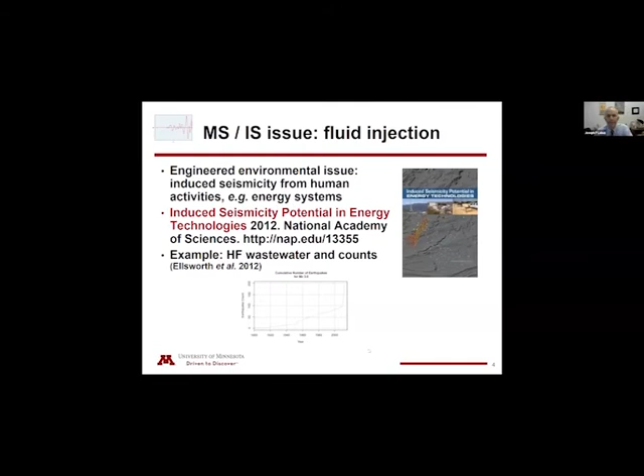And this is just one example of looking at counts of earthquakes above a certain magnitude that very recently have taken off. And this is in Oklahoma. I guess a number of the students may not know of this, but there was a similar incident in the early 60s, just outside of Denver. The Army was pumping waste fluid within the earth, and induced seismicity was created. This started a large investigation, and in fact did lead to the suggestion that we may be able to control earthquakes by pumping fluid or withdrawing fluid.

And a big part of my talk is going to feature locations, and I'm just showing an example from the Raleigh paper of tracking of slip along a fault that was known to exist, where a number of events were located along this fault.

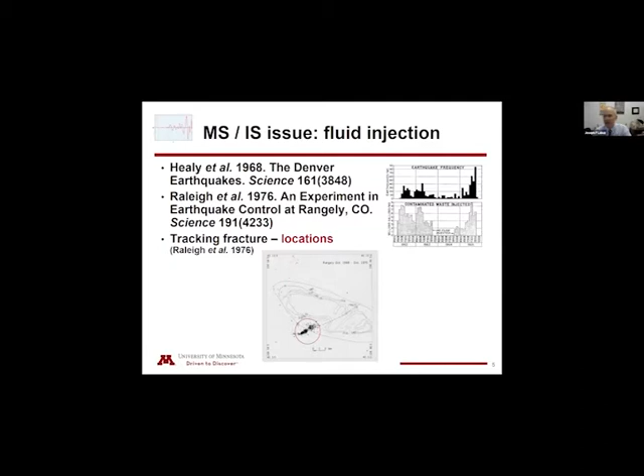Okay, so I'd like to provide a very brief background on acoustic emission, the theory of acoustic emission. And it's really driven by seismology, the field of the study of earthquakes. I mentioned locations. This problem was solved in the 1900s, and certainly there are a number of different types of techniques that are used to locate the seismic event. In the 1930s, there was a book on seismology that was published. And of course, I wanted to reference a very valuable reference for any work dealing with the propagation of waves, and that is the Aki and Richards textbook on seismology.

In the 1940s, the study of microseismics as it relates to the underground, that is a mine, began here in the United States with some very nice work that was being performed at the US Bureau of Mines, which no longer exists. But this report really started the mining industry to look at monitoring mines for microseismic activity as an important safety feature. So work really took off then, not only in the US, but South Africa, Germany, Poland, dealing with the use of microseismic as a safety procedure within mines.

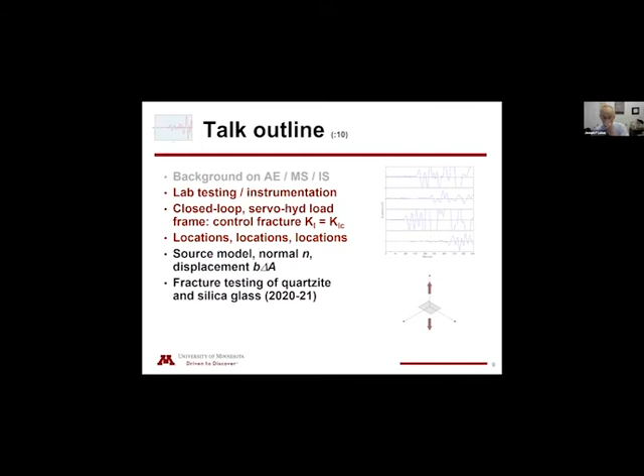Okay, we have a big advantage in the lab in that we generally know the region of interest in which we want to monitor the deformation processes that are taking place. Typically, that region is on the order of 100 millimeters in size or so. This region, of course, is a volume, so we will sample through the volume. We can position our sensors such that so-called blind spots are not an issue. This can be important in field studies where, depending upon the sensor array, it may be difficult or impossible to locate events in certain areas.

Because we're working in the laboratory with small magnitude events, very small in size, the frequency content is inversely proportional to the size. So frequency content is on the order of hundreds of kilohertz. So we need a very fast data acquisition system. We sample typically 50 nanoseconds per point. The electronics now are such that we have 16-bit resolution. We simply start recording when the time history exceeds an amplitude threshold. So this is a very simple way of starting the recording process. The digitizers are such that there is a buffer that remembers the information prior to the amplitude threshold.

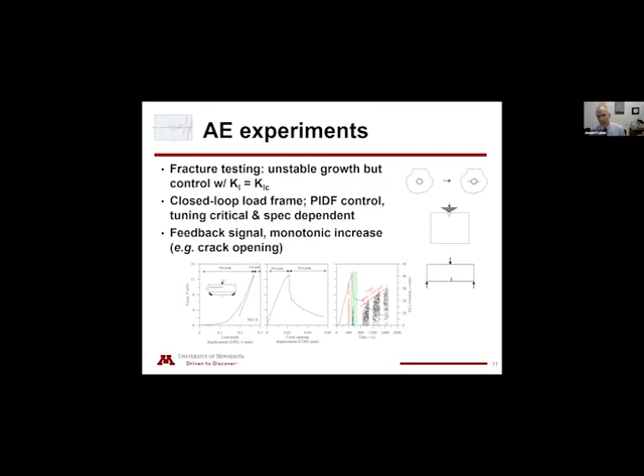So this propagation of this fracture is rapid as compared to the propagation that takes place in this softer type of response that we're observing, where control is much easier. I just wanted to mention that the beam is a very nice analog for tensile fracture, certainly within the rock mechanics environment. That is the types of problems where we deal with cavity expansion, for example, in hydraulic fracturing. This is a tensile fracture type of process, indentation mimicking rock cutting, again, a tensile type of process. At least that's what is hopefully achieved in indentation.

So as I said, I'll concentrate on the failure mode of tensile fracture in flexure, in the bending type of loading. And for the most part, the loading configuration will be 3-point bending. We have done cavity expansion, splitting, Brazilian testing, indentation, and of course, confined compression. But I'll be concentrating on the tensile failure results.

The location problem, as I said, has been well studied. For us, the problem is not that difficult in the sense that our material is more or less homogeneous. For the most part, we work with rock that's fairly isotropic. So the location problem is not difficult. Because of the amount of data that can be generated, picking the first arrival is usually done through some algorithm. So for example, I'm showing an acoustic event, that is a signal that's recorded on 4 channels.

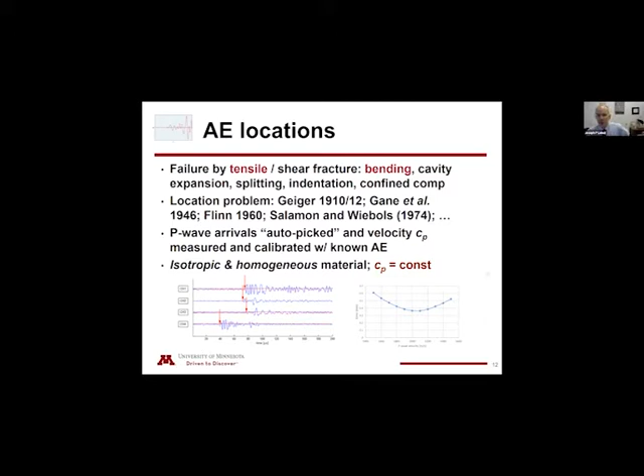Okay, a nice way to look at locations is graphically, and for a 2-dimensional problem, it's easy to show, it's easy to construct. I should mention something about error, and of course this is in quotes because we don't know the answer. So we calculate a location. From that calculated location, in reference to the position of each sensor, we can calculate a distance. And we can compare that distance with a distance that we also compute, because we have to find the origin time, the time in which that event took place in reference to the arrival of the signal. So this time difference multiplied by the P wave velocity gives us another distance. And this difference for each sensor gives us a measure of, we call it error.

So in terms of the 2D analysis, we can construct hyperbola. So this is a parametric equation for a hyperbola. Delta T subscript 1, 2 is simply the relative arrival time between 2 sensors. So again, I'm showing a time history that's recorded from one event on 4 channels. And the red arrow indicating the first arrival of the event associated with the P wave. So channel 1 in reference to channel 2 has a difference in time that we can measure, and that's the delta T that would be used in computing the characteristics of this hyperbola. And of course, we do that for a number of events, and where those cross indicates the location.

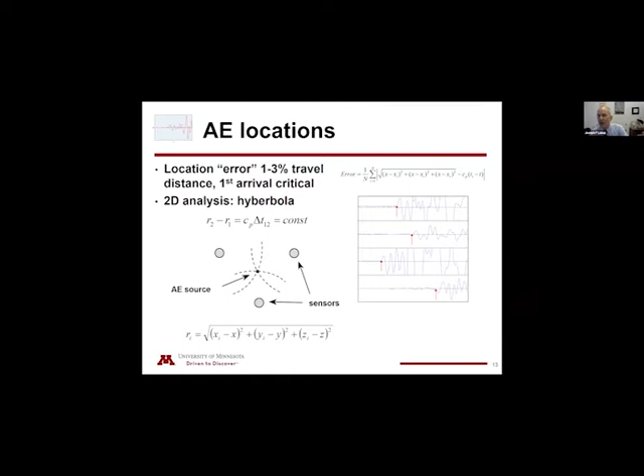Okay, as I said, we record thousands of events, and the solution then needs to be developed where we have a numerical algorithm. We have 4 unknowns, and we can set up an optimization problem where we minimize an error to find these 4 unknowns. The things that we do know, the arrival times, we take the P wave as a known quantity. It can be treated as an unknown and found within the minimization procedure. I mentioned the automatic picking of the first arrivals. And again, this is set up to be solved in a least squares type of algorithm.

I'm now showing results again for a beam test with a smooth boundary, no notch. And these are locations of acoustic emission. I'm showing them just on the XY plane. So I should have indicated a coordinate system. For us, X will be in the horizontal direction, normal to the development of the macro fracture that will appear in this beam. Y is in the vertical direction, and Z is in the thickness direction out of plane.

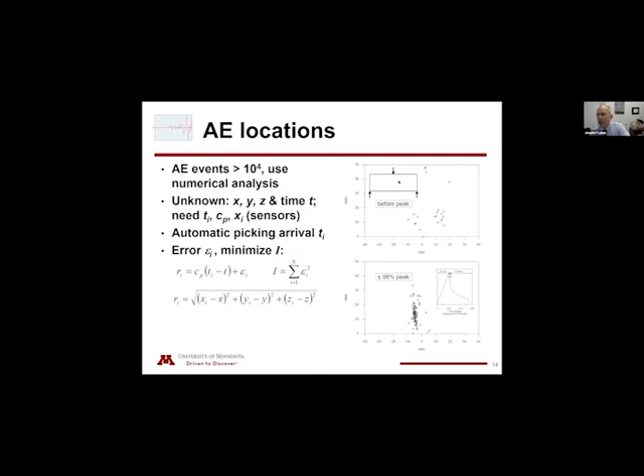The other thing to note is this is a smooth boundary. The loading is 3-point bend. The maximum moment, of course, is along the line of symmetry of the beam. That's the position 0. But the fracture is developing slightly off center because of possibly local heterogeneity of the beam, as well as possibly some imperfections in our loading system. That is how we position the beam.

These are, again, the same results. This particular beam was of 75 millimeter height. If we test the same material, similar geometry, but double the height, this beam now is 150 millimeters in height. I would argue that the picture of this clustering of the events, again, around peak load is very similar. So this fracture, at least for this material, for these size beams, is developing in a similar manner.

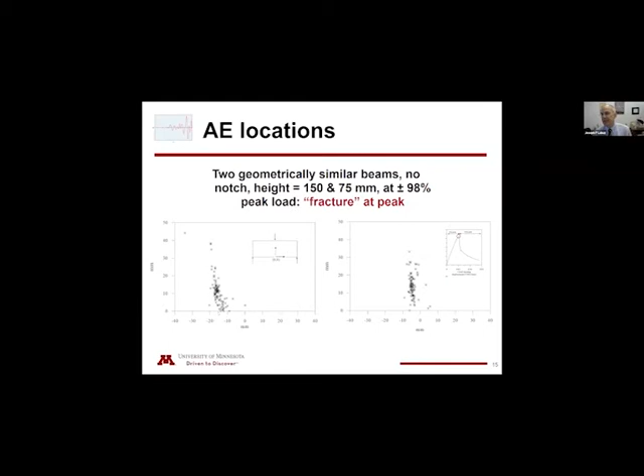So I would argue that AE may be one of the most effective ways of monitoring fracture, including propagation. It has the advantage of sampling the entire volume. A disadvantage is, of course, there's location error. So if we want to determine a crack length of 10 millimeters and we have an error of plus minus 2 millimeters, that may not be of a fine enough resolution.

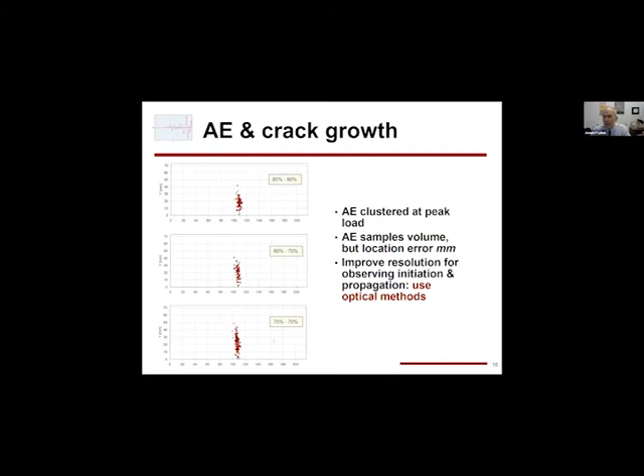So what to do? Well, in a laboratory setting, we can use optical methods. So we've done that. We started with speckle interferometry, and certainly this is a technique that other people have used. So we copied from work at Northwestern with Professor Shah's group. The nice feature of speckle interferometry is that it's simply based on optics. So the processing of data is trivial. Setting up the optics is quite challenging.

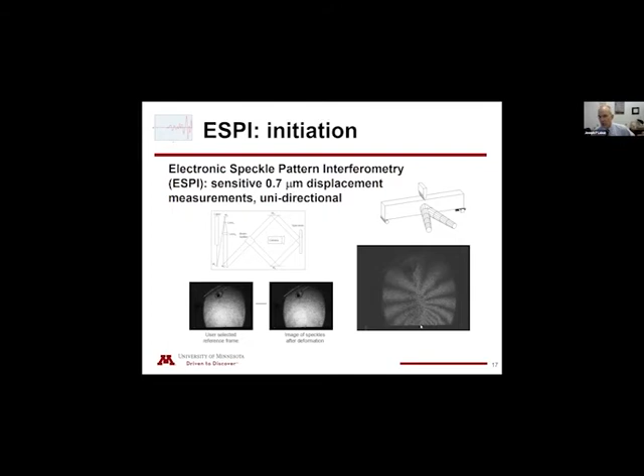So what I'm showing here is a condition that is measured at peak load. And these fringes that develop are due to what I would describe as a displacement discontinuity, a fracture that's forming at the bottom fiber of the beam. And this particular beam is also with no notch, smooth boundary. We can use the information about the fringes because each fringe indicates constant displacement in the X direction only. So it's a limitation of at least our system.

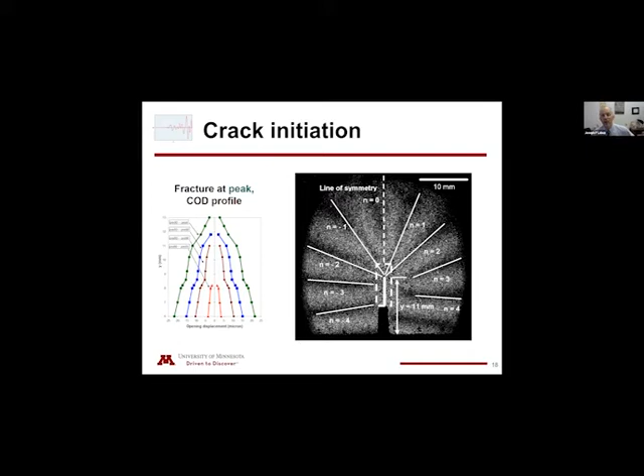And we could track the crack opening profile as well as the position of the tip as the fracture is initiating in the beam. This particular beam is now one where there is a notch present. There are some disadvantages with speckle interferometry. We could not use this within a closed loop system because of the vibrations that come through from the servo valve. So not a very convenient technique.

I'd like to review with you now theory related to determining more information about the crack, and I'll show you brand new results. So I'm ready for tough questions. Dealing with fracture of, I would describe as a brittle rock, a quartzite, and a brittle material, so glass.

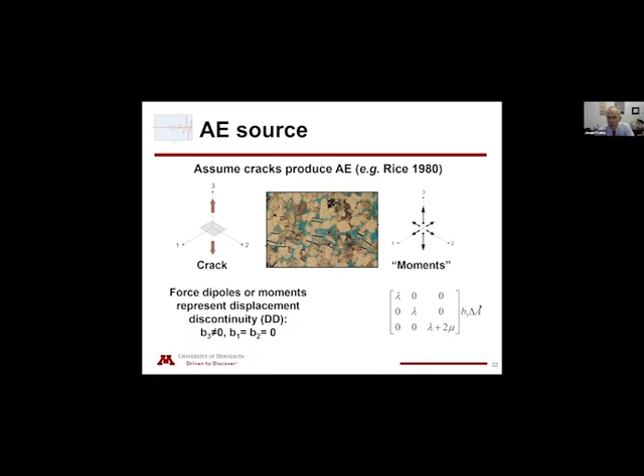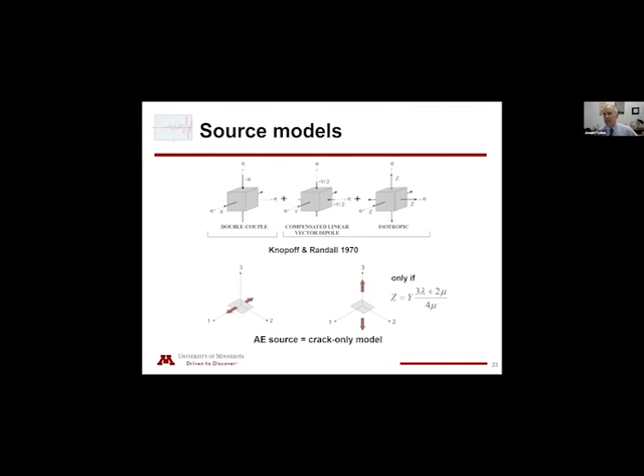I should mention that in seismology, generally, earthquakes are associated with shearing type of mechanism. So within seismology, the important part of the moment tensor is associated with this double couple. There often are other parts of the moment tensor that can have a physical interpretation. For example, the other part can represent a crack that opens if the combination of these force dipoles are such that this relationship holds. So to have a crack only model, we need to build our moment tensor to have a certain configuration.

Now, another way of approaching this is to look at, instead of the moment tensor, what is sometimes referred to as a displacement discontinuity tensor or a crack tensor. And that's this quantity psi, where B is the displacement vector and N is the normal vector. And immediately you see that we could interchange B and N, and psi does not change. So this is a limitation of the analysis.

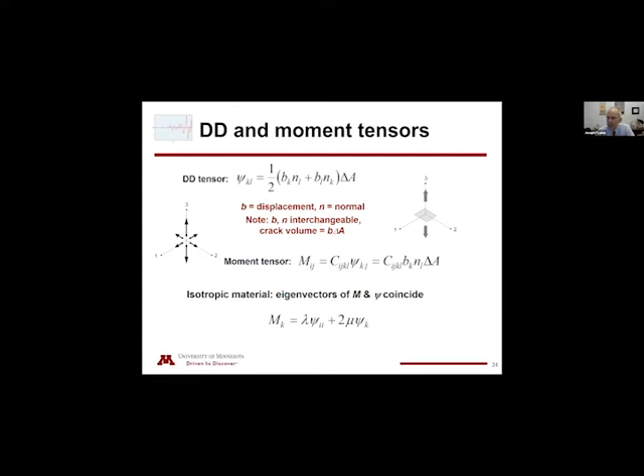There is a simple relationship between the moment and the displacement discontinuity, and that's given by the elasticity of the material. So we could write the moment tensor in terms of B, N, and delta A by knowing the elasticity of the material. For an isotropic material, so again, an important assumption for us, the eigenvectors of M and psi coincide. And this is convenient because if we now solve the eigenvalue problem for psi, the displacement discontinuity tensor, we'll be able to write the quantities that we're after.

So note that the displacement discontinuity tensor has the intermediate eigenvalue that's 0. Only the major and minor have values, and the magnitude of the event is related to those two. It's the difference. And an important angle for us is given by, again, the minor and major eigenvalues of psi. And this angle alpha is a measure of the angle between the first eigenvector and N, or of course B. So the mechanism will only be known if this angle is 0 because then N and B coincide.

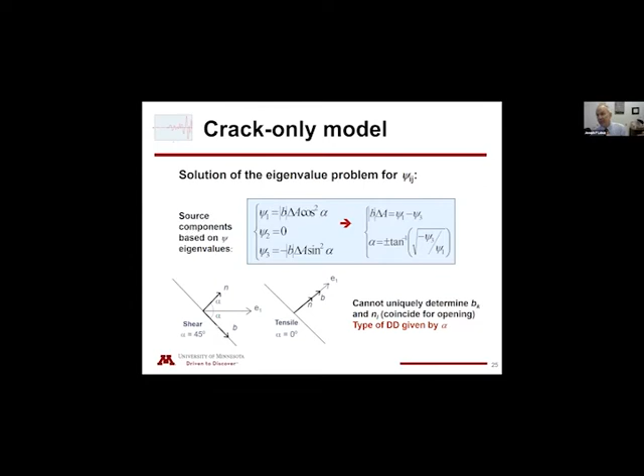So the important information that we'll be able to obtain from this analysis will be B delta A, alpha, in which we will be able to compute N and B, but N and B can be interchanged. Okay, so we use an approximation of a point source in an infinite domain. That solution is well known. It's available in various references.

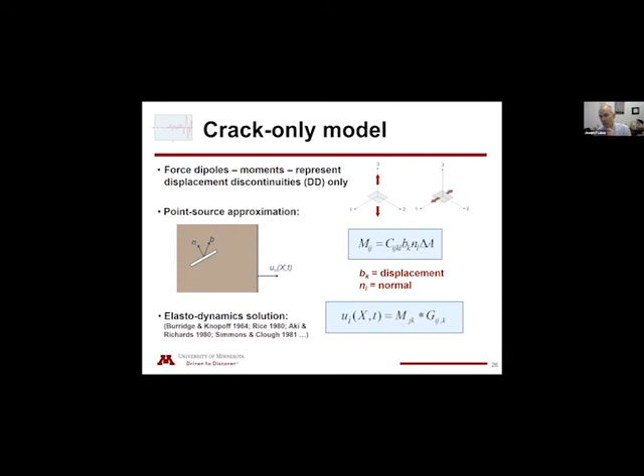So in terms of how we use this solution, we place our sensors at the boundary of a specimen. We claim we can measure, so calibration of the sensors becomes very important. We can measure the displacement at those locations. So we know the displacement, we know the Green's function for this point source in an infinite domain. We need to solve the inverse problem for the moment tensor. The way we need to do that, because we do use the solution that's written out in terms of the moment tensor, we have to guarantee that the intermediate eigenvalue of M takes this form, because we want the model that's associated with crack only.

So we claim we can measure the displacement at the position of the sensors. We calculate the displacement that the moment associated with that event would produce at that position. We do adjust for the free boundary in terms of a mode conversion that takes place at the free surface. And this other part is the constraint that we must impose to get the crack-only model.

I'm showing here quickly the results of a calibration experiment where we produce an artificial event, and this artificial event is a rapid unloading that's produced by breaking a glass capillary. So the blue is the signal that's measured. The orange is, if I could say, the signal that is calculated based on the elasticity solution associated with that calibration procedure. And we relate the voltage that we measure from the time history to the displacement that's calculated from this elasticity solution.

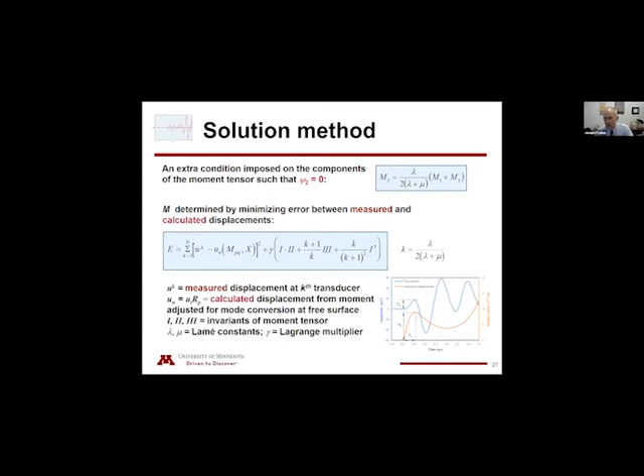Okay, so let's show some results. The first material is a rock. So we might describe this as a quasi-brittle material, but this is a very strong, stiff, brittle rock. I'll be showing results from two types of specimens: a beam, again in 3-point bending, that has no notch, a smooth boundary, and also a beam with a center notch.

The results I'll be showing, although we tested various size beams, so we did perform a size effect analysis to look at conditions associated with linear fracture mechanics size beams. I'll be showing results for a sub-size specimen. So the span is 130 millimeters, the height is 50, the thickness is 30. Of course, a smooth boundary has no initial notch. The other beam, with the center notch, is nominally 10 millimeters in length.

This rock is virtually all quartz. The density is quite high, so the specific gravity of quartz is 2.65. We're very close. This material virtually has no pores, only cracks. So the Young's modulus in compression is this value of 70, whereas in tension, it's 55. And if we assume a random distribution of penny-shaped cracks, we would estimate a crack density of 17% based on these numbers. The grain size is quite fine.

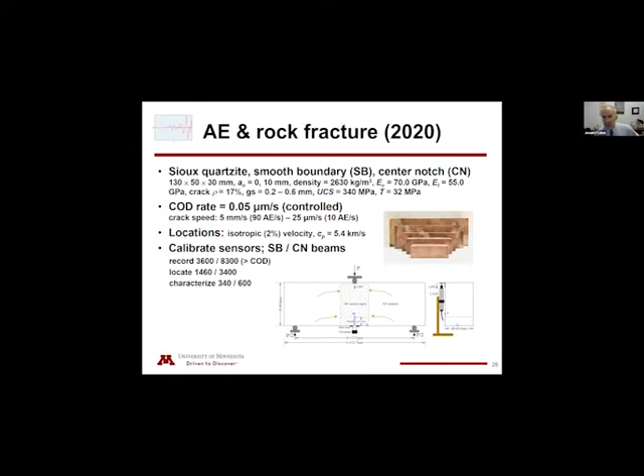So the smooth boundary, 3,600; the center notch beam, because we went to a larger crack opening displacement, about twice that number. We can locate more of them, but this is within a certain error, so 1.5 millimeter error, and we're able to characterize, again, within a certain error, and I'll show you how we define that for these numbers. Again, the geometry: some of the beams we do have DIC, but I won't be showing those results. So only results related to AE, as well as, of course, mechanical response.

That's my timer, so I have 5 minutes.

Okay, the alpha values. This is a mode 1 fracture test, and these alpha values are shear dominant. So I didn't say it, but if alpha is equal to 45, that's a shear crack locally, and we have an average value of 41. We also use a polarity method to check against the crack model that we're using, and it gives us similar results. But it's not the complete picture because this is local.

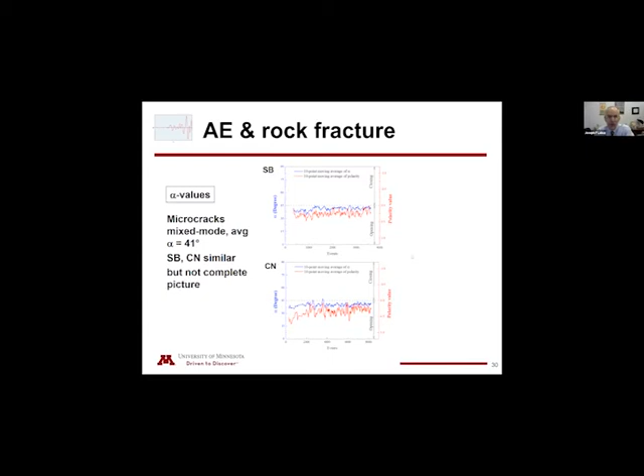So of course the crack has some orientation, and if that orientation is not vertical in terms of how we are setting up our specimen, then just considering that opening is in the X direction, there must be some tangential component. So at least that's how we explain this dominant shear behavior. So these are now the results of the B delta A components, by decomposing that vector quantity, the B, in the X, Y, and Z direction. So this is the global coordinate system where X is normal to the fracture that's developing in this rock.

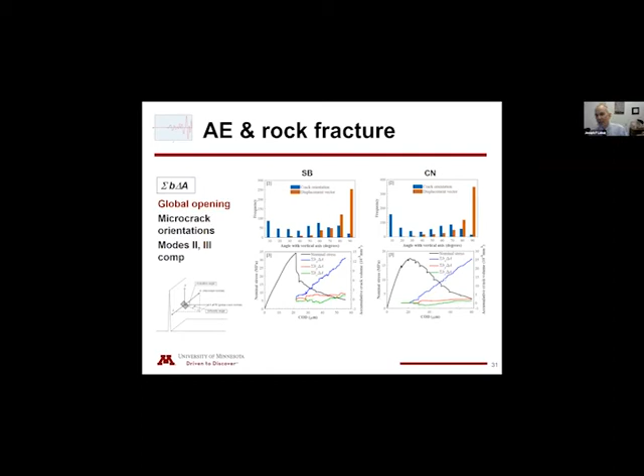And you see the dominance, as you would expect, for the analysis of these crack events. It is interesting to see not only a Y component, but a Z component that is taking place out of plane, right? Certainly these values on the order of 2 × 10⁻³ are much smaller than the BX component, that is the opening. And it's consistent for both beams. And in fact, you see a larger opening just because we have more events for the center notch beam. Okay, let's get to the good part, and that's the glass.

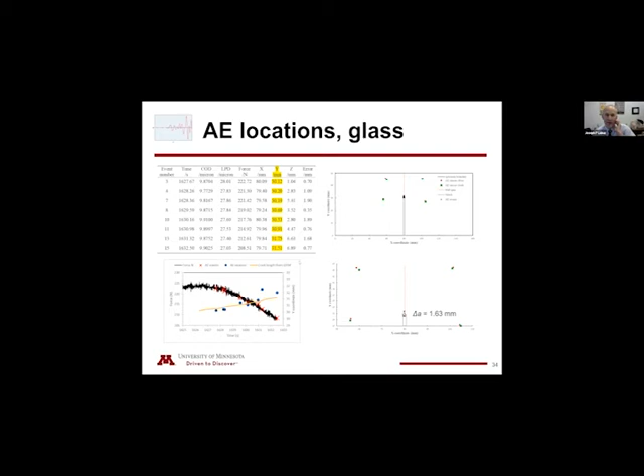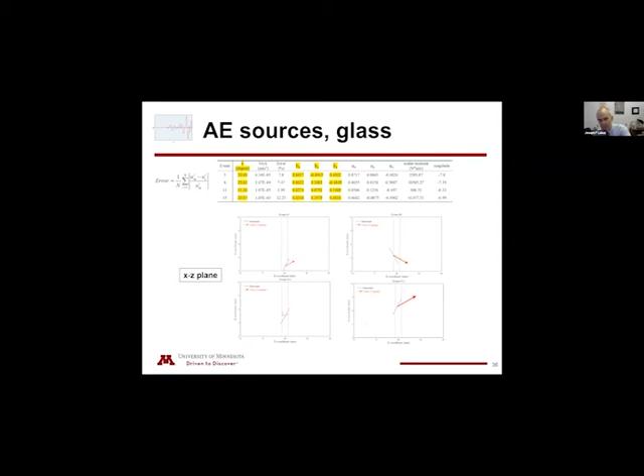It's interesting to look at the Z component. So now we'll look down on the beam. So this is in the XZ plane. So again, the opening that we like to see, but there is a significant component out of plane, and that's shown by these numbers, right? These two are going in the opposite direction, but then you see these other two that are in the same direction of Z. Okay, finally, because I'm out of time, it's difficult to control, as that test indicated.

So we went to using a sandwich beam. So this was recommended to us by our colleagues in Italy. And this is a very nice paper that was written by a group in Trento. Certainly trying to get stable fracture using stiff elements is not new. Very nice work done at Northwestern. But this is a very simple approach, and it was successful for us.

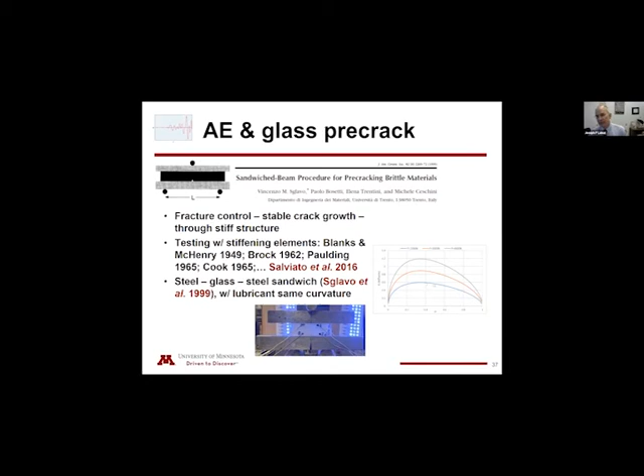I'm just indicating here what the analysis gives for this type of geometry. And if you choose a notch length appropriately, you do have stable fracture that takes place. So we were successful in stable fracture. This is the force displacement response. You see the growth of the crack, see locations of acoustic emission.

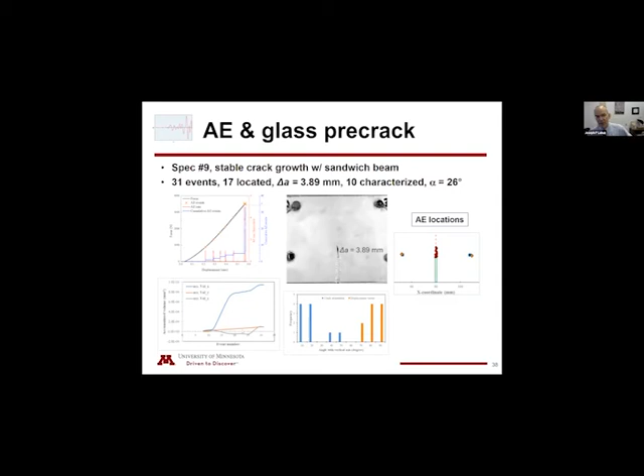If we look locally, again, we have mixed mode locally. Globally, these little cracks are opening with little displacement in the Y and Z directions. Finally, we were successful with that pre-crack using conventional types of fracture test methods. These are the locations that track the crack.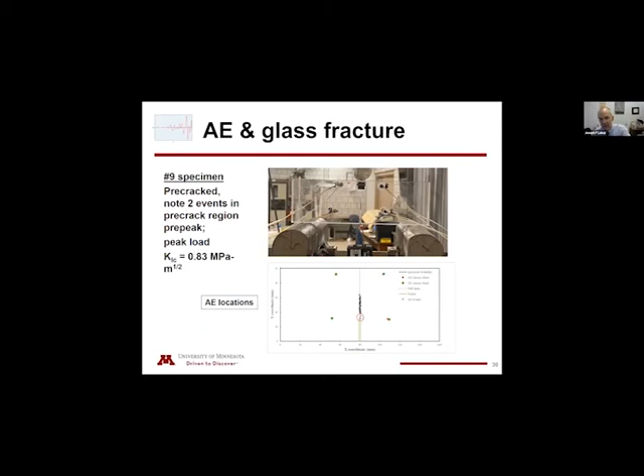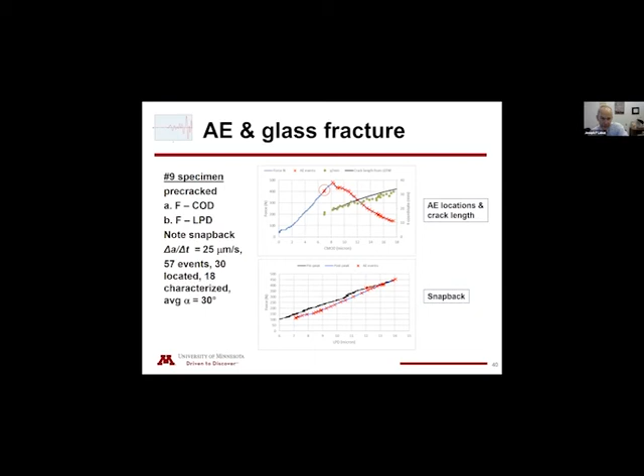It's interesting to note that there are 2 events that take place within the pre-peak region. So possibly due to some interlocking that has taken place, we do get events along the pre-crack. We were successful in monitoring and controlling crack propagation, similar crack speed that we saw from the test with rock. Again, very strong snapback, and again, mixed mode character, locally opening.

Thank you, Professor Labuz. Thanks very much. And if we weren't doing this on Zoom, you would be hearing the applause now. Feel free to show your reaction on Zoom. This is a wealth of information for all of us, and a lesson in how to do careful experiments, I think. I have a couple of questions, but I'd like to open it up to students, colleagues, anybody else. Do you have to run at any moment, or do you have time? No, I have time. I'm sorry, I thought I was doing well on time. No problem. John, was that you that had a question?

Yeah, thanks, Joe. That was great. I learned a lot about acoustic emission that I hadn't known before. Being a theoretician, I have greater appreciation for the difficulties of experiments. I have 2 questions that I think are short. Could the mixed mode behavior be due to slight deviation of the crack? And the other question: as I understand it, you usually only use the arrival of the wave. Is there anything you can do with the rest of the wave train that would be helpful?